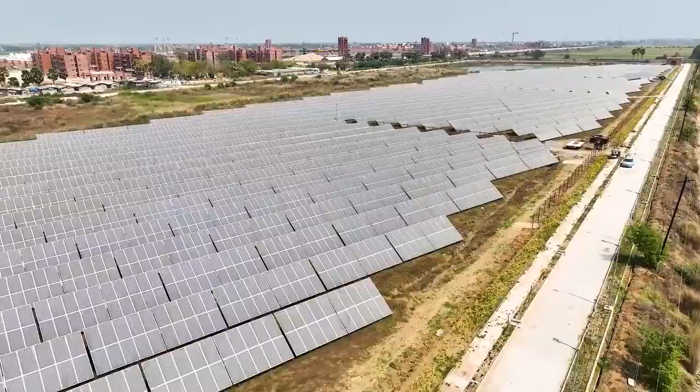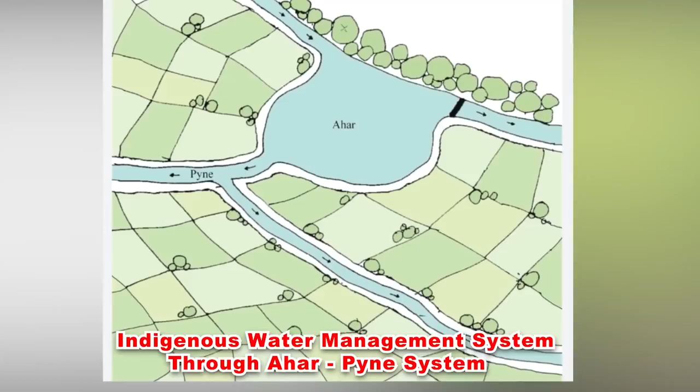The Nalanda University campus is probably the world's largest net zero sustainable green campus. The key sustainability features include net zero energy, net zero water, net zero waste, and net zero emission. This hybrid concept, featuring renewable energy sources with an indigenous approach integrated with various innovative technologies, shall exemplify rational approaches for construction of other upcoming projects, campuses and community construction models in future.

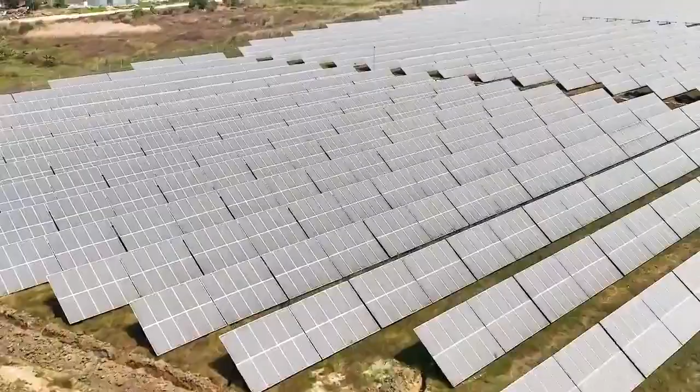The campus combines state-of-the-art technologies with the planning principles of the ancient Nalanda University to create a carbon-neutral and zero-waste campus. Some of the most important indigenous aspects and concepts for passive methods operating at different scales include a 6.5 MW solar PV captive power plant, a 1.2 MW biogas plant, and desiccant evaporative technology for cooling and heating of the buildings.

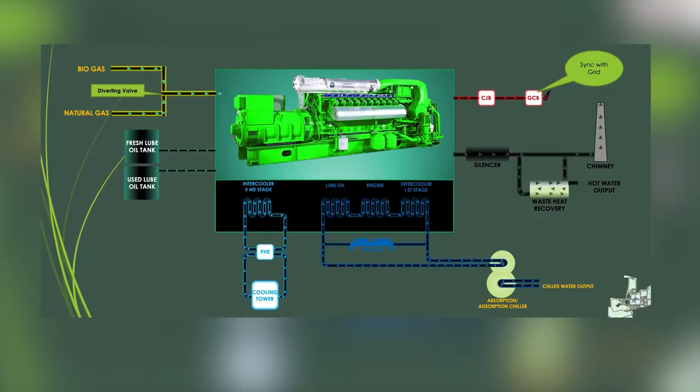Other features include solar integrated thermal storage technology for the HVAC system, use of compressed stabilized earth blocks instead of common burnt clay bricks, thick cavity walls to increase thermal resistance, climate-appropriate landscape design to reduce potable water demand, decentralized water treatment systems, cooling and cleaning of the air through selected native plants, and a building management system.

The main entry gate symbolizes the university as the temple of knowledge acquisition and a seat of higher learning. The first gate along the main road is the first threshold, marking the entry to the campus. The next grand entry gate, 7.5 meters wide, forms the neck, screening people and vehicles in. The large, curved volume creates a sense of pause and calm, as felt in temple entrances.

The academic spine spans in the north-south direction of the campus. It houses around 40 classrooms of various capacities with a total capacity of 1890 students, ranging from 25 to 300-seater classrooms, an examination center, international relations office, placement cell, meeting and discussion rooms of various sizes, and other common facilities like faculty offices, laboratories, and a 100-seater mini auditorium.

In the southern side of the spine, the Grand Sushma Swaraj Auditorium is situated, followed by two guest houses, namely Campus Inn and International Center. The academic spine is grandly welcomed by a huge semicircular catenary.

The Grand Amphitheatre, with a capacity of around 2,000 spectators, is situated at the center of the Kamal Sagar, the central water body. The amphitheatre has a green room and a dais at its center. The structure is surrounded by a huge water body, giving the audience an extravagant picturesque view featuring the lake in the backdrop.

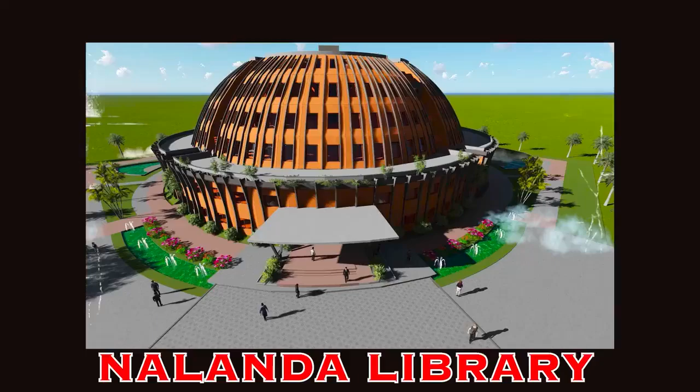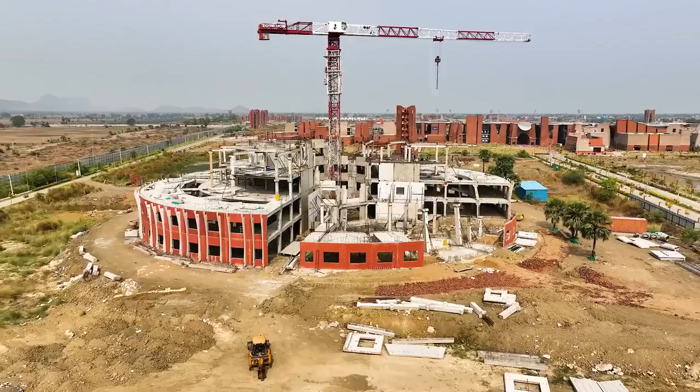The Nalanda Central Library building is envisioned to provide state-of-the-art facilities for study and multidimensional development of intellect, and a locus for collaboration. The building has a built-up area of 17,545 square meters. With more than 3 lakh book volumes and over 3,000 user capacity, the huge Nalanda Library building is being built in ground plus 5 floors.

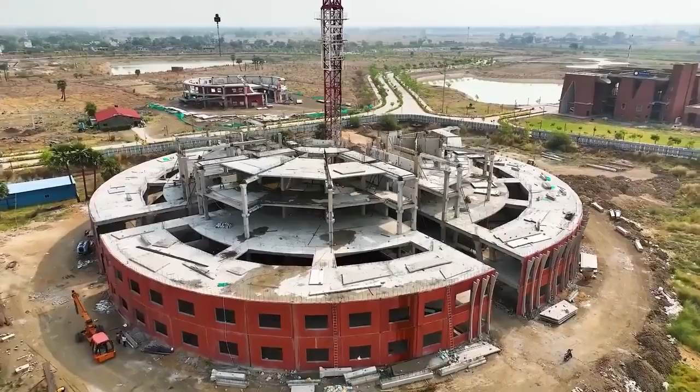The building is shaped as a spherical stupa divided into 4 quadrants, with an outer radius of 81 meters at the base and a height at the crown of 26 meters, making it probably the biggest dome in the world. The works for construction of this building are in full swing.

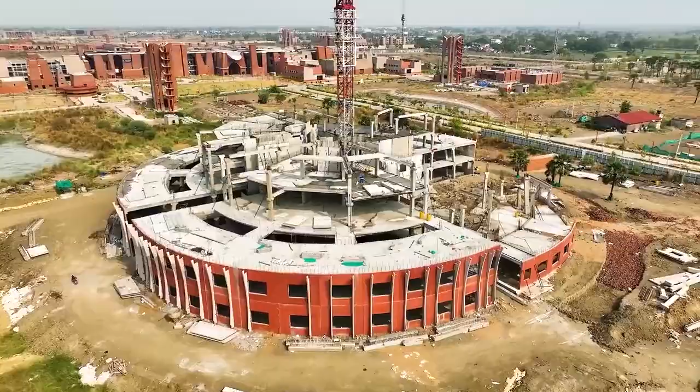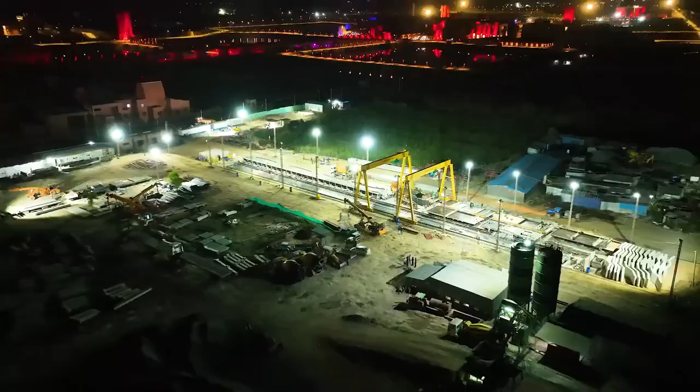In order to fast-track the progress, precast construction methodology has been adopted, wherein structural member pieces of RCC pre-stressed columns, beams, walls and slabs are cast in the casting yard, transported to the site and erected sequentially floor by floor. Over 75% of the civil works for the building is completed, and the building is likely to be handed over by the end of this financial year.

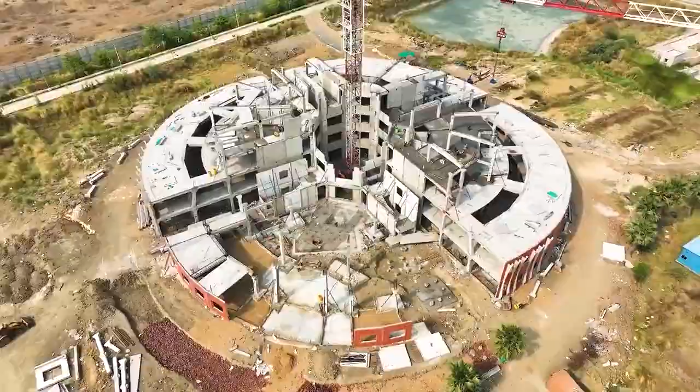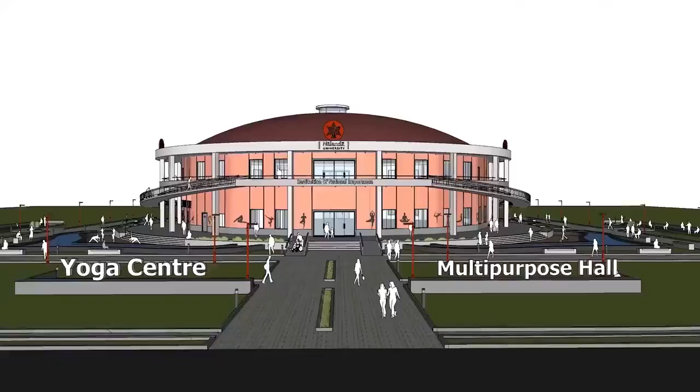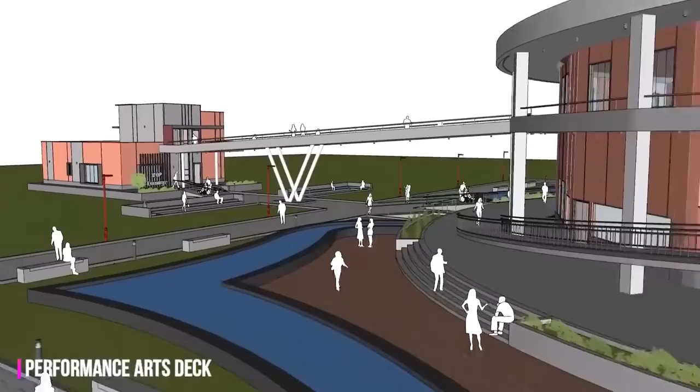The Nalanda Yoga cum Meditation Center is being built right opposite the Central Library building. Built in ground plus 1 floor, the circular building has a built-up area of 4,186 square meters. The ground floor is a 500-capacity multipurpose hall, and the first floor is the yoga hall with 266 yoga mat capacity, along with ancillary facilities like green rooms, cloak rooms with lockers, and toilet banks in adequate numbers on both floors.

For VIP visitors, a VIP lounge facility is also there, connected with the yoga hall through a sky bridge. The roof of the building is spherical dome shaped. The yoga center building design symbolizes the 7 meditation chakras, and the entire planning of the base of the building, including the surrounding landscape, is based on the Muladhara Chakra. The roof of the building resembles the Sahasrara Chakra.

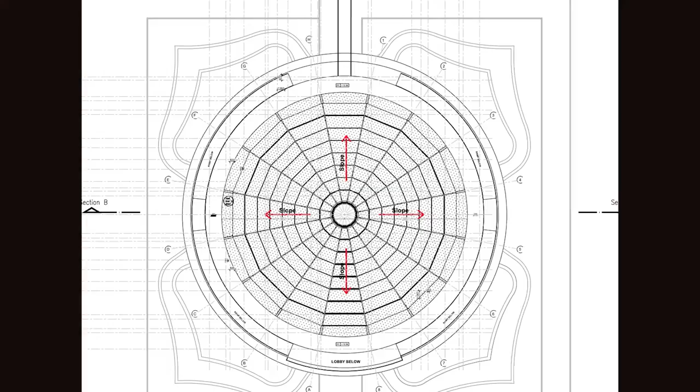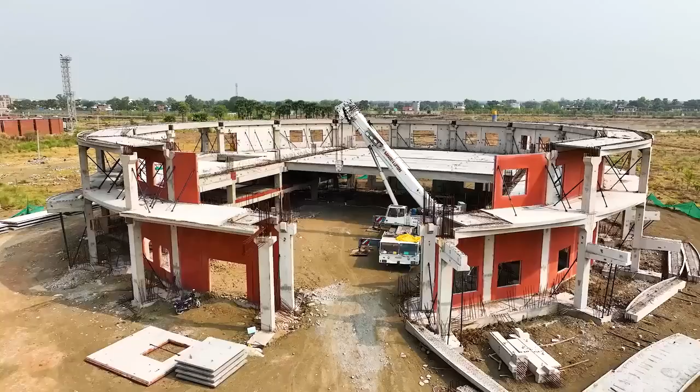The VIP block has been designed and integrated with the main yoga block to give a holistic retreat experience. Works of this building are also being carried out using the precast system. Erection of both floors of the building has been completed, and the overall physical progress of the building is over 80%.